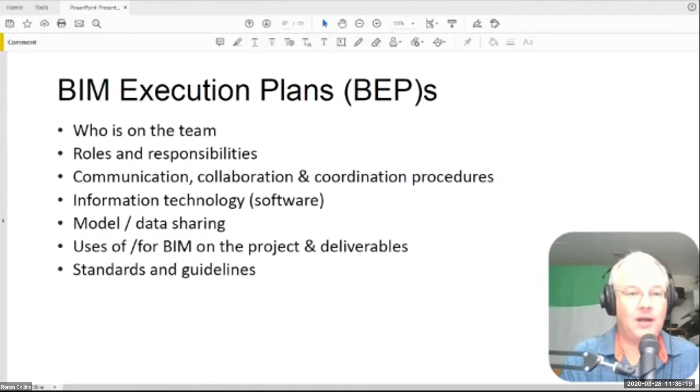Who, what they're going to do, how they're going to collaborate, what technology they have, how they're going to share information, and what standards and guidelines they're going to follow. So a BIM execution plan is no different than any other management plan.

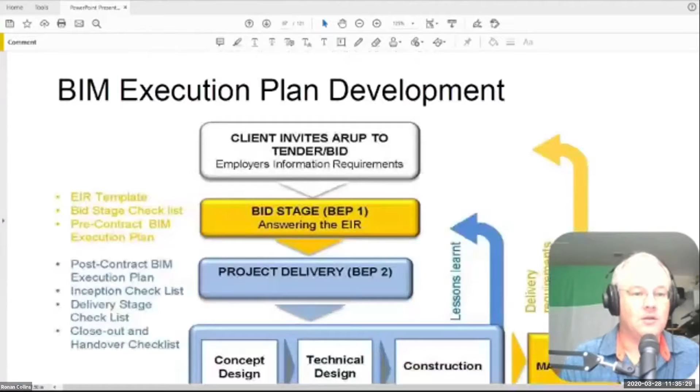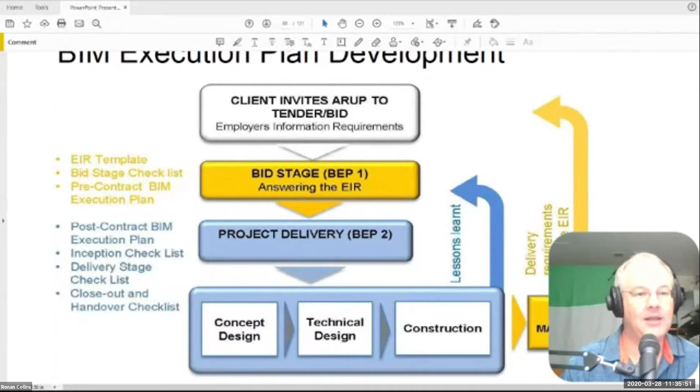So you can look at this diagram here, which I've stolen from Arup, and essentially, this is Arup's internal workflow for how they develop an execution plan, and it covers all the phases of the project. So you go from the client starting the process with their requirements. There's a bid stage when the consultant is actually tendering. So they should actually have a checklist, and they should have a pre-contract execution plan. So a good consultant will already know how to respond to the clients that need BIM or want BIM.

Once they're actually appointed, this is this idea of a post-contract. This is the actual project. This is not post-project. This is the contract appointment. There's an actual execution plan for the project. There's a delivery checklist, and there's a closeout and handover checklist, handover being to the contractor.

So they do their concept design, they do the technical design, and they support construction. Arup, being Arup, have a lessons learned flowchart, and then ultimately they're handing over information for asset management to hand back to the owner. So this is one consultant's way of doing it.

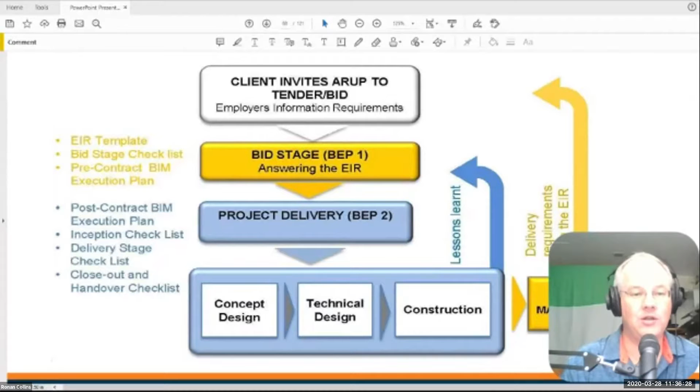I've listed down here what are the key essentials that you need to have in one of these documents, and I've broken it into 3 columns. So the technical side is the software, the coordinate systems, the level of development. You guys talked about LOD. If the LOD is not covered in the client specification, you can put it in the BIM execution plan if that makes people happy, and all the training requirements.

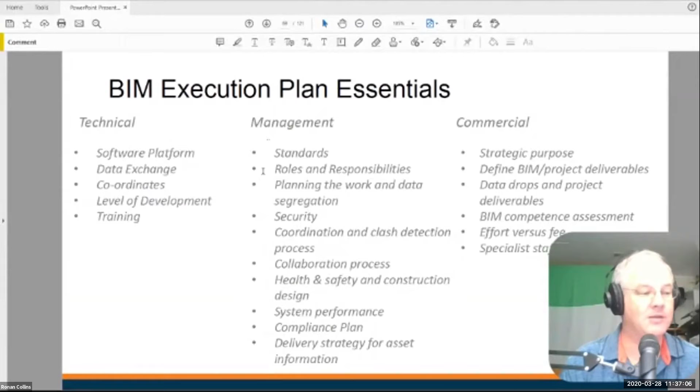You can see that the management is the longest list. So one of my friends in Hong Kong once coined BIM as best if managed. So it's a process that needs to be managed, and that requires resources. And the question I posed to you in the first breakout, nobody actually identified the human resource as a key issue. So you need to have enough people who can manage the process, not just about making models, but actually managing the process.

So you have to have coordination processes, collaboration processes, health and safety and construction processes, compliance plans, and a delivery strategy for asset information. And then most importantly, a commercial strategy. You need to understand what the purpose is, what the deliverables are, what you have to deliver in terms of data, what assessment is required, what the effort is going to be compared to the fee that you can charge, and what specialist staff or resources you may require.

So if you have a complicated roof like you have on the roof of the West Kowloon Terminus high-speed train station, you're going to need some very specialist operators to be able to handle that. If you're building a multi-story car park with some research labs, you may not have to do it. So again, the complexity is an issue and you may need to allow for specialist staff.

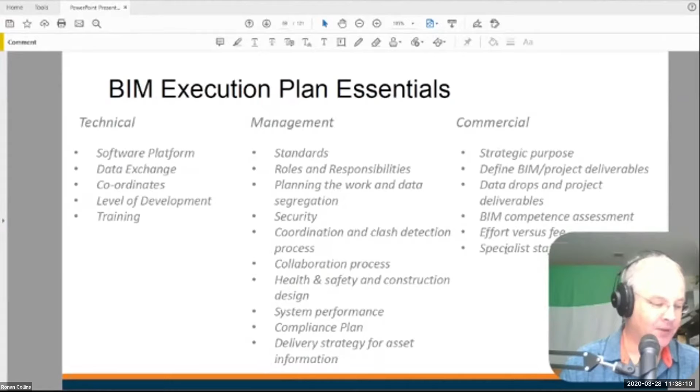And again, Gamuda as a business is actually putting them in the public space and letting them show off to the industry what they're doing. So they're not putting salespeople out there. They're not putting fronting up people, marketing people. They're putting the actual engineers and technicians in front.

So we see BIM as a collaboration enabler. You can see this diagram popping up again, this idea of a central single source of truth. So when it comes to models, we want all the models in a single location. So you can either use ProjectWise, you can use Aconex, you can use Viewpoint for Projects, you can use BIM 360. It doesn't matter what the platform is, as long as everybody's using the same platform. So we want to make sure that all the design changes are always visible to all the team members.

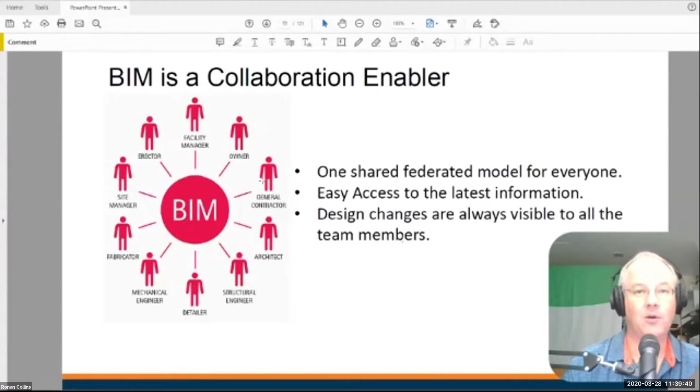So we don't want to have a situation where we've got an architectural change that's been talked about for weeks and weeks and weeks, and no one's seen any evidence of it. And then all of a sudden, there's a whole big upload of models, and everyone's 4 weeks, 6 weeks behind schedule. So we want to see continual updates of information.

So there's no limitations. The only limitation is you can only upload your model. You can download everybody else's model. So you cannot overwrite, the architect cannot overwrite either deliberately or by accident any other model. They can only upload their own files.

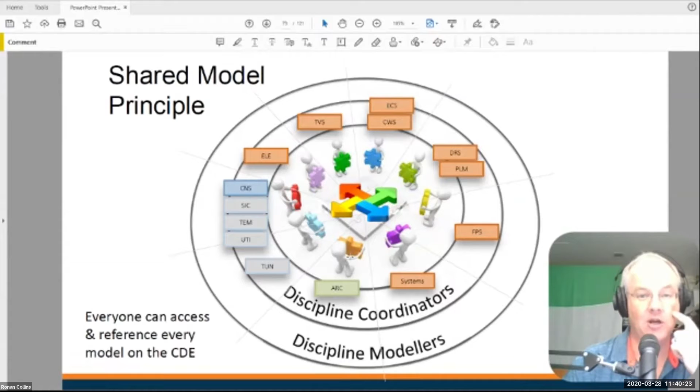So we do spatial coordination, and it's become known as clash detection, I guess. This is the single biggest benefit of BIM in that we can identify problems and resolutions. So this idea of BIM is that it enables early decision-making and resolutions for design and construction clashes. If we can solve the problem in the model, then we can reduce the waste in time and effort and avoid abortive works on site. If the problem is in the model and it's not solved, well, then it's going to be a problem on site. So our attitude is, let's find as many problems in the model as possible.

Let's get them fixed, and let's get them fixed before we start construction. There is greater certainty that the design is coordinated and design documentation is consistent. That is only true if the design documentation is coming from the models.

If you have been involved in, or you're going to become involved in a project where you suspect that the consultants are doing 2D drawings and retrospectively or later making models, then you are never going to get a model that's consistent with the drawings. The drawings and the models will never match because the people that are generating them are doing it for 2 different purposes. So you need to make sure model first and draw second.

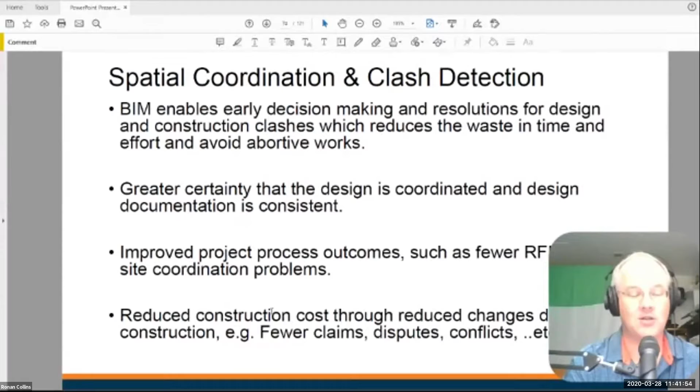If you use BIM and do coordination properly, you can reduce the number of RFIs from site, and you can reduce the site coordination problems. It all comes down to doing this work as early as possible. There is no point doing clash detection when the construction process is halfway through. If the concrete frame for a building is up, then you can forget about BIM. It's a waste of time. If you've only started doing foundations and you've got 6 months of foundation works, then you have a great opportunity to use BIM to solve lots of problems.

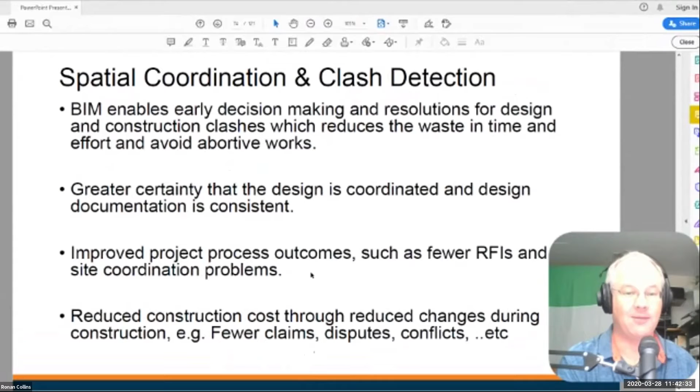The reduced construction costs is through reduced changes during construction. So there's likely to be fewer claims, fewer disputes, and fewer conflicts. If this is being used properly, and if the client is being responsible, if they make changes to solve coordination issues, they're still viable variations, but we don't have to wait till we actually make them up on the site. We can solve them, and it'll be cheaper to solve them in digital space. So this is a coordination process.

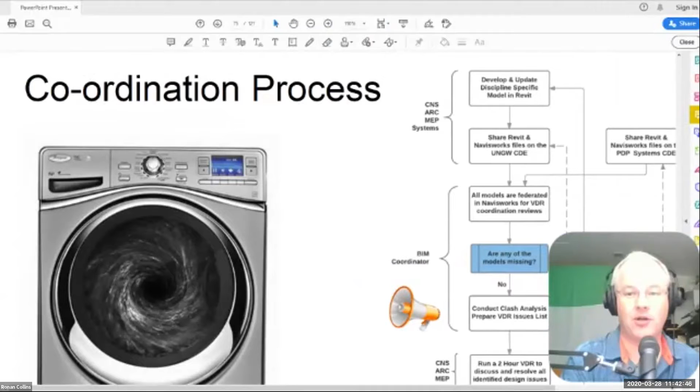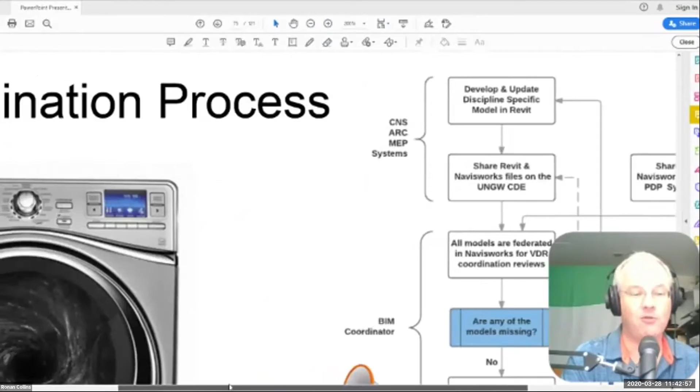I'm going to zoom into this workflow. I've used the diagram of a washing machine deliberately. This is a process that goes around and around and around. And so it's basically an iterative process. It's also a process that once you've been through it a few times, you may well feel like you've been in a washing machine for an hour or two. So the process is quite straightforward.

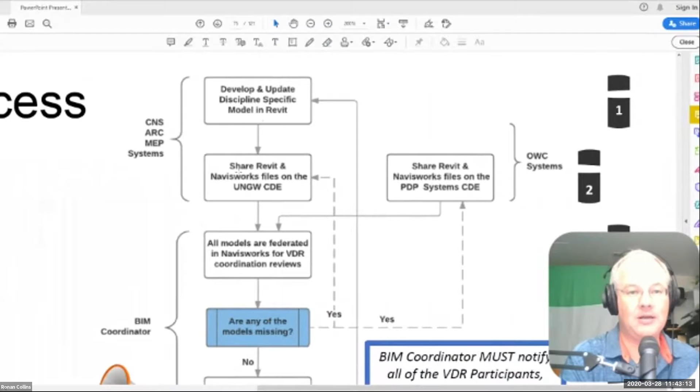You start off with, and you develop a specific model for a specific discipline. So it could be architecture, structure, MEP. That specific model is shared on the CDE. So you can actually get that model shared to everybody else. You have a BIM coordinator or a BIM manager. They make sure that all the models are available. If there's any missing, they go back and find the missing ones. And then they do their coordination review or clash analysis. And they prepare a virtual design review issues list. So they prepare a list of issues that have to be discussed at the next meeting.

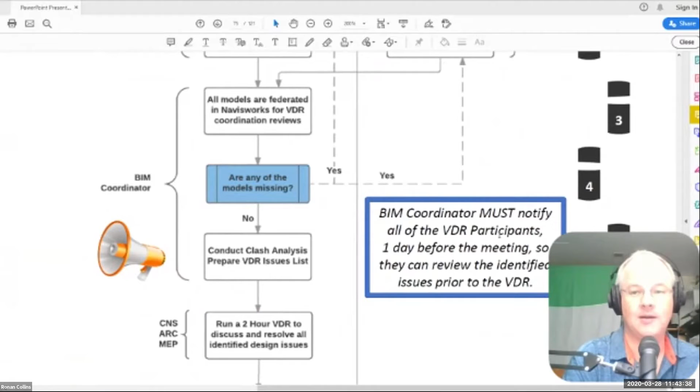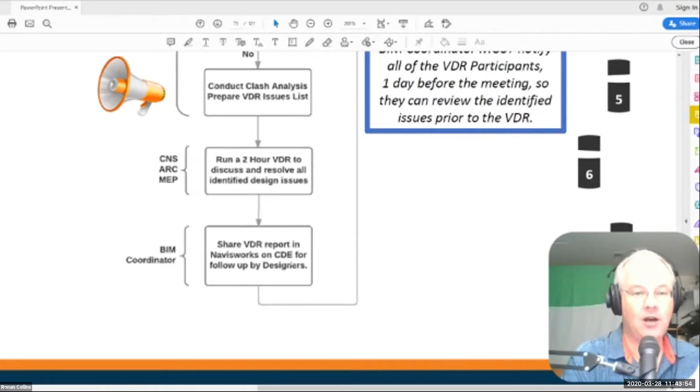Then you run a 2-hour meeting. So you run a 2-hour VDR. So you limit the time, because that's about as much time as you can keep people focused for. So you do a 2-hour session and you resolve all of the identified design issues, or as many as possible. And then you share a report of that discussion using Navisworks on the CDE. So everybody can see what was discussed and everybody can understand what's happening.

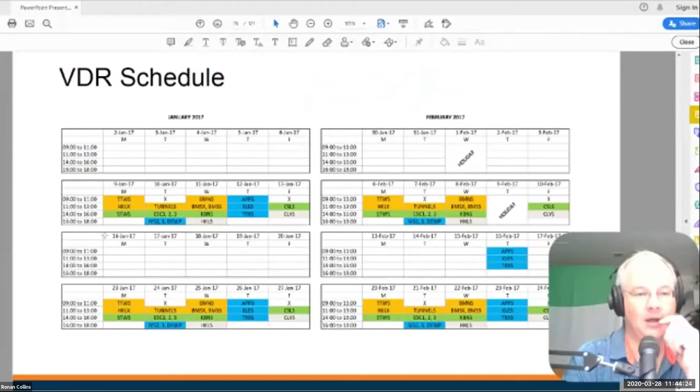So one of the things that we did on this project was we had a schedule. There were so many stations across the project with multiple design teams. Basically, we set up a schedule that every Monday, the same stations were discussed every 2 weeks. So if you were working on, for example, Titiwangsa, you knew that on Monday morning at 9 o'clock, you had to go to a workshop, and every Monday thereafter, that was the workshop you were going to for Titiwangsa. And that was the same schedule all the way through.

Whenever there was a holiday, the meetings would get pushed to the following week. So in certain circumstances, there might have been a week between the meetings, but for most cases, there was 2 weeks between the meetings. So that 2-week gap was enough time for the designers to continue their design, for them to collaborate and share in between and make sure issues were resolved. So this goes back to BIM management. This goes back to managing the team with a schedule and saying, we want to meet every 2 weeks on these dates and we want to run a workshop.

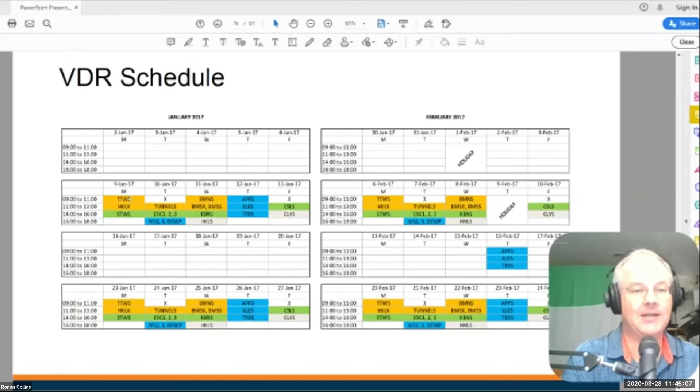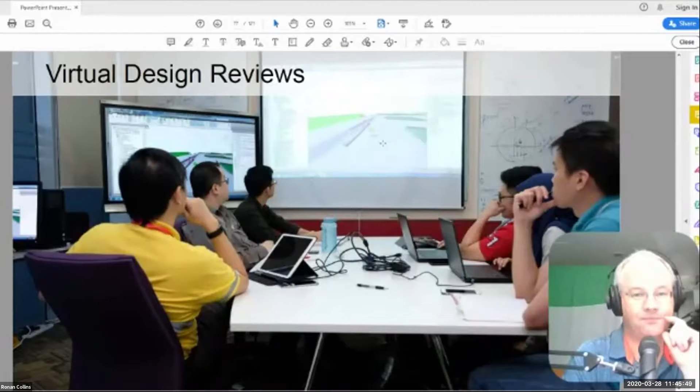So some examples that you find in the early stages. So you can see here pipes clashing with ducts. You can see electrical systems clashing with staircases. And in this case, what's happened is in this area, the electrical consultants have misinterpreted the drawings and not realized that this is actually an escalator well in the station. So again, you can see these problems and go, oh, what an idiot. But you've got to realize what's caused this particular problem.

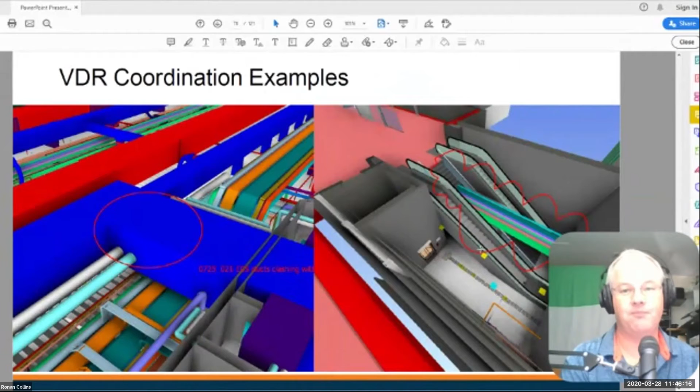So here's what we do in terms of the actual process, right? We use a simple process of tracking all the issues. So all the issues are saved as a simple viewpoint. Each one is in a folder dated when it was found, and then we've numbered them sequentially so we can keep track of the numbers. And then the manager or BIM coordinator reviews all the previous issues and closes them out if they're closed.

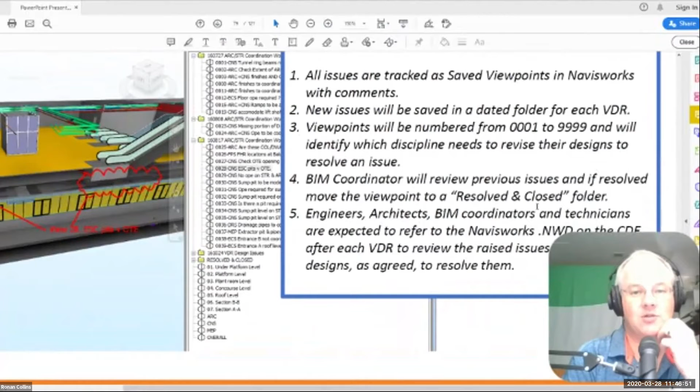And this is the key point. The engineers, the architects, and the coordinators are expected to refer to Navisworks on the CDE after each meeting to review the issues and amend their designs as agreed to resolve them. So the meeting notes and the coordination discussion are recorded and kept on the CDE. So there can never be an argument about what was discussed, who discussed it, or whatever else. And if anybody wants to figure out what was discussed, they can go to the CDE and find out. So we make the model the center of the coordination process.

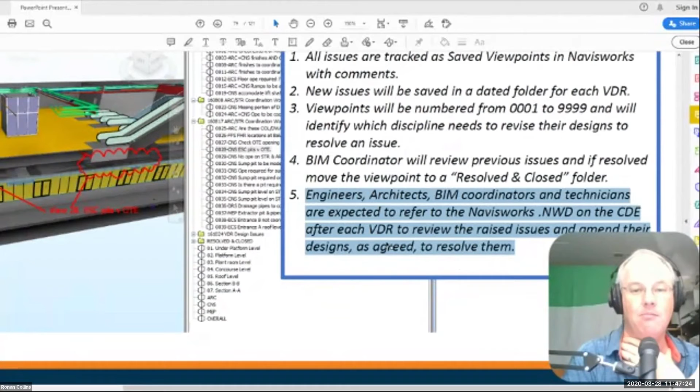And when you look at the actual system, you can go in and all the models, there's a specific location for these models, and you will see every single meeting has been recorded. And at any point in time, we can go back and look at the model and see what was discussed at that particular point in time. So we have a full record of all the coordination meetings and all the issues that were discussed, all the way through the design stages. So this can be very useful if you want to go back and look at the evolution of the design and what issues have been discussed and resolved.

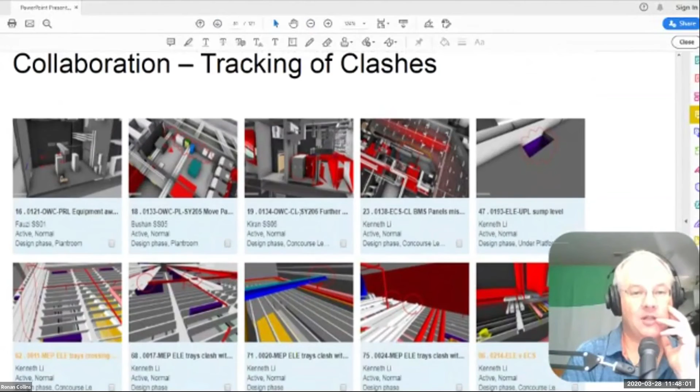Now, one of the things we discovered is that because you have these models sitting on the servers, unless you open the model, you don't know what the issues are. So we found a piece of technology. Our problem, because don't forget, we want to solve problems with technology. We don't want to find problems to fit technology. So our problem was we did not know how many issues were in what station, and we did not know how many issues were assigned to what consultants.

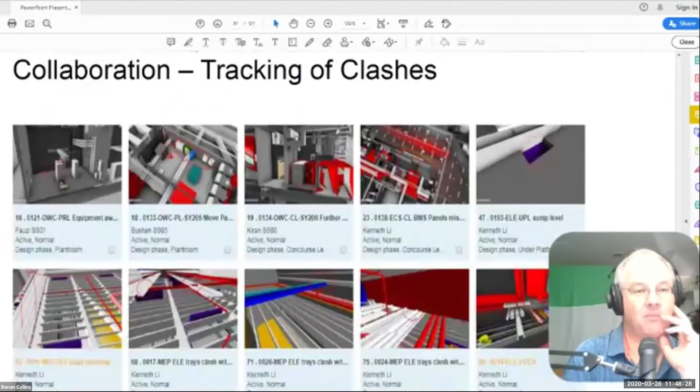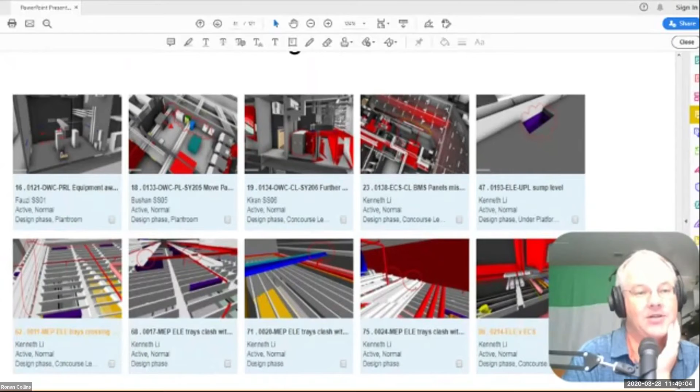So what we discovered was there's a piece of software called BIMcollab, and BIMcollab is a cloud-based platform that connects to Navisworks, and you can link all the views that you have in Navisworks to the cloud platform. And then, as a manager, you can use a browser, so Chrome or whatever browser you prefer, and you can then go and see all the different clashes. And you can see who's been assigned a clash, you can see what the comments were, you can see the clouds, and then you can track all the different issues across all the different stations.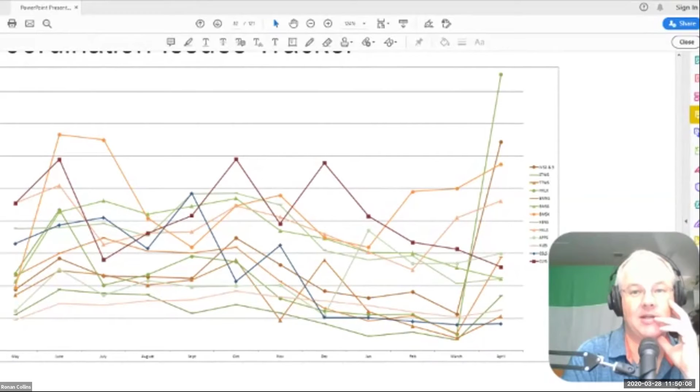And what we're doing is we're measuring the number of issues on a square meterage basis so we can get some alignment. So we basically take the square meterage of the particular station and we count the number of issues per square meters, and that's how we get a percentage. So then the acceleration of issues is because of the increase of the amount of information in the models. So that's how we do our coordination.

We basically have a process where people share the models on the CDE. We have a process where those models are checked. We have a process where those models are then reviewed in a meeting with a number of people that can make decisions. And then we record all those issues and we track them with these kind of dashboards. So that's how we do it.

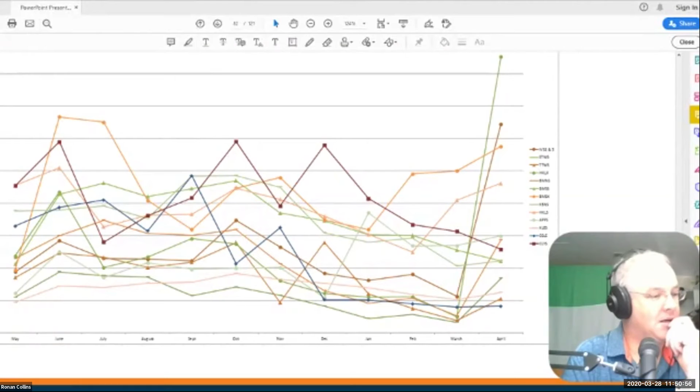Does anybody in the group have an alternative way or another way of doing it that they want to share before I move on to the next topic? Or does anybody have any questions about what I've just shown you? I have a question. Great.

So the increase in number of clashes, that's never going to improve though, because each contractor has their own way of doing things, and during the design phase, you would never be able to guess, and it's not quite logical to guess. So then in the design phase, you're always designing to kind of a conventional, and then the clashes will come later.

Yes and no. So okay, don't forget, this is a design and build contract. So in this situation, we are a management contractor, and we have appointed the AECOM consultants to produce buildable, coordinated models and drawings. And it's included in their scope of works that the definition of buildable is that we don't have to move pipework and cable tray and ductwork to allow for secondary supports and hanger systems. So in our opinion, they should have positioned the pipework and cable tray and ductwork in such an arrangement that we can thread hangers up and down between them.

But the only way to actually determine if that's true or not is to actually put the hangers in. Now, the good news is there's some very simple tools you can buy as a plugin that you can put into Revit, and it will put in hangers at 1 meter centers indicatively, and then you can very quickly see where those hangers are clashing.

So the thing is, we didn't put the hangers in. This is March 2018. We didn't start modeling the hangers till 18 months into the project, because we didn't see the benefit in doing it until that point. So we did not put the pressure on the consultants until the design was nearing completion. And once they started saying, oh yeah, our design's near enough buildable, then we said, okay, we need to check all of the secondary support systems. And it wasn't just the mechanical systems. We did that for the handrails, for the architecture, for the ceiling systems.

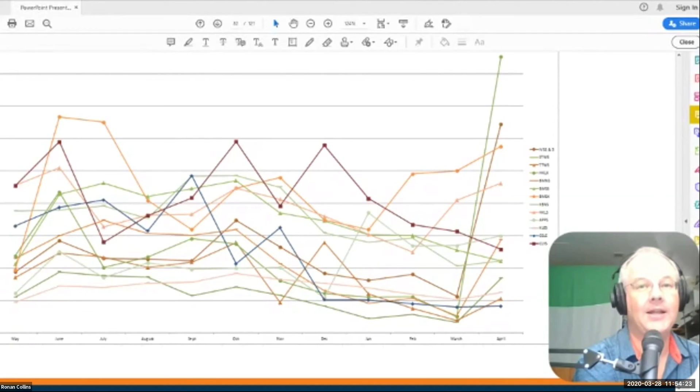And it all comes back down to the BIM deliverables and BIM schedules. And the example I share with you guys in the PDF, it's on the contractor to solve this issue. And like I said before the coffee break, if the contractor sees that the pipework and the cable trays cannot be coordinated, and they're going to start clashing with things like ceilings, or they're going to have to get moved into spaces they shouldn't be in, then it has to go back to the design team to get resolved.

And that's where it becomes an issue. If the design team are not able to or willing to solve the issues quickly, then BIM becomes a null and void point, and the problems are just going to turn up on site. Eventually, the architects and engineers are going to have to fix it. It's just a case of whether you fix it in a model or whether you fix it on site.

So there's two issues. One is defining what has to get modeled and why it's getting modeled. And the second question then is, once you figure that out, when do you model it? And at what point in the design process does it get modeled? Does that help, Wendy?

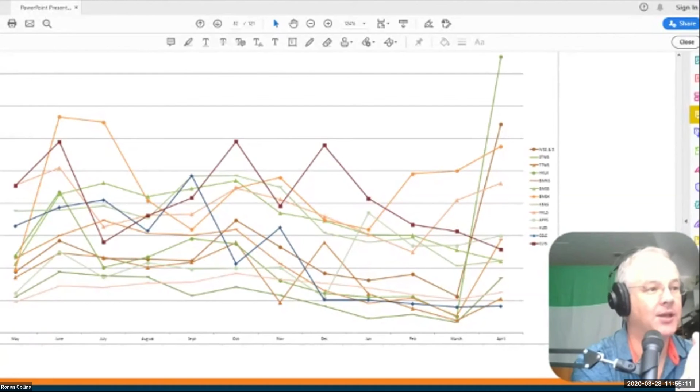Yes. Yes. Okay, cool. Okay, any other questions about modeling and coordination? Because this is the main crux of BIM as it stands in the industry right now. Does anybody have a different experience they want to share?

So I have another question if no one else. We did a past project, and we were level 2. We used a common BIM sharing space, a lot of the things you were talking about. But one problem we had was our project was very bespoke. So a lot of the components that we were looking at were not industry available products. So a lot of times you have to solve a lot of the design issues as and when they appear. You don't really know.

So in that case, it's very difficult for the model to be set up correctly from the early work stages. And it's even more difficult to assume things like what structural support, etc. And from listening to a lot of BIM lectures, I feel like perhaps BIM is very suitable for things that are already quite standardized, whereas for very bespoke items, it's very challenging.

Okay, so the thing about that, Wendy, is I don't know what you mean by bespoke, but I'm guessing it's some kind of unique design or something unusual. In my experience, the only way that kind of project gets built is if you're already talking to people who actually understand how it's going to get manufactured and installed. So, for example, I was involved in a project that was a major sports facility in North America. It was in the US.

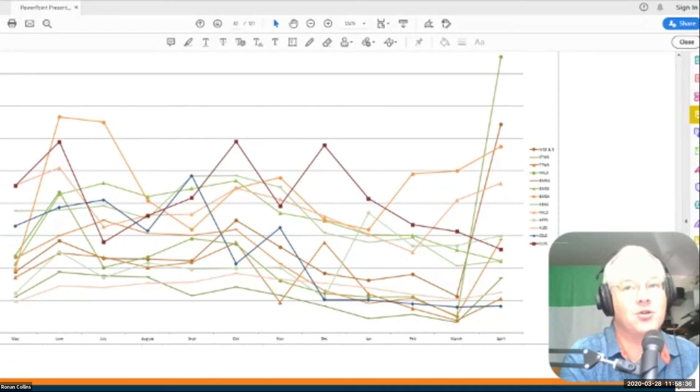And we urged them to find a manufacturer that had 3D digital manufacturing capabilities that could get involved in the project, either as a consultant on paid fees or as a nominated subcontractor that could actually do the work and develop the project going forward. So this goes back to this notion of early contractor involvement. You can model anything you like in 3 dimensions. You can take out something like SketchUp or Rhino, and even now Revit's got some pretty powerful modeling tools. You can create whatever 3D geometry you like.

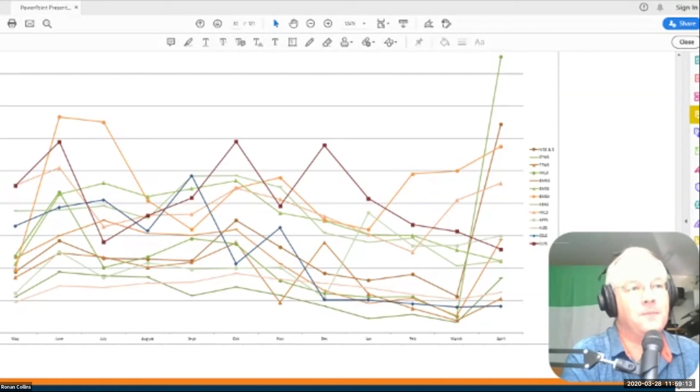But if you don't know how it's going to get manufactured and installed and what sequence that's going to happen in, you can't really do any detailed design or any detailed coordination. And the only way to solve that problem is early contractor involvement or early supply chain involvement. So if you're doing a bespoke project and those objects are not normal, yes, there's limitations in current libraries of models, but you can be sure that if you find the right supply chain, you will solve those problems.

What was the bespoke thing that you were doing, Wendy, just out of curiosity? We're doing a hotel in London, and we have a very bespoke facade system, and for the interior design, the client didn't want anything off the available market. So all items were literally bespoke. We had to model every single component family. We used nothing from existing libraries, and that was not fun.

I hope you charged them a lot of money for that.